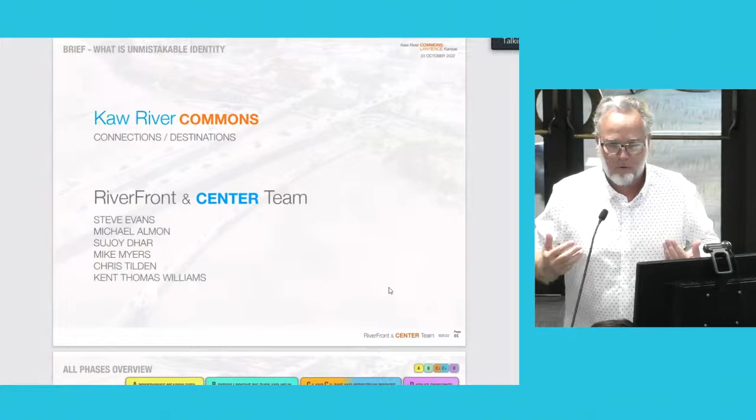In the context we're talking about here, unmistakable identity, I think we're talking about aesthetics, education, context, transit connections, ecology, how humans interface with the things that we create. We've become a society that creates amazing things, yet we've lost touch with how humans interact with these things. What is the narrative? What is the consensus that got us here? What was the initial intent aesthetically? That starts informing how unmistakable identity is unique to us here and the narratives that are important to us.

So I'm a part of the Riverfront and Center team. That's Steve Evans, also here. Michael Almon, Sujoy Dhar, Mike Myers, and Chris Tilden. And what's your name? Sorry. And I'm Kent Williams. Forgot to do that.

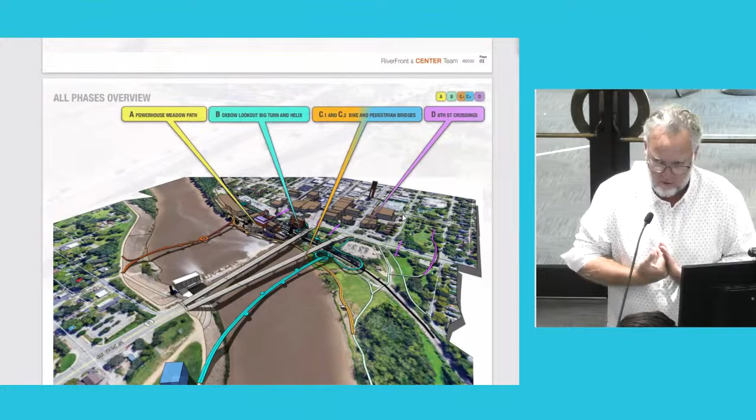I'm a Pinckney resident. I think most of you have seen this. I'll just quickly go over what we've been pulling together. This shows six phases in closing the loop from Santa Fe Station to Burcham Park, and then it also addresses conflicts that exist in this area for humans. It addresses the conflicts that the train tracks create, the conflicts of the twin bridges, and the wonderful barrier that is the river and getting across it.

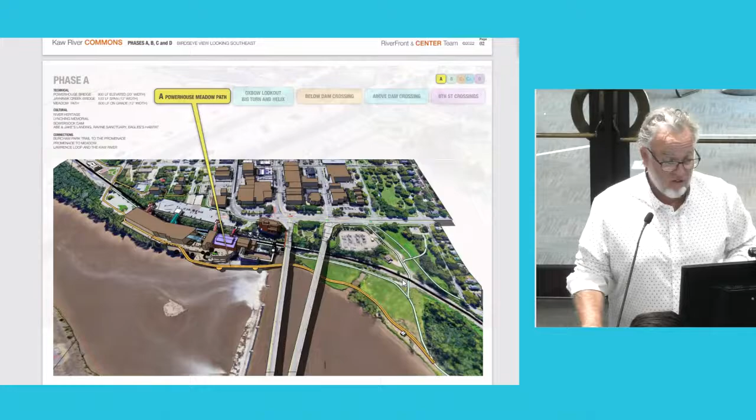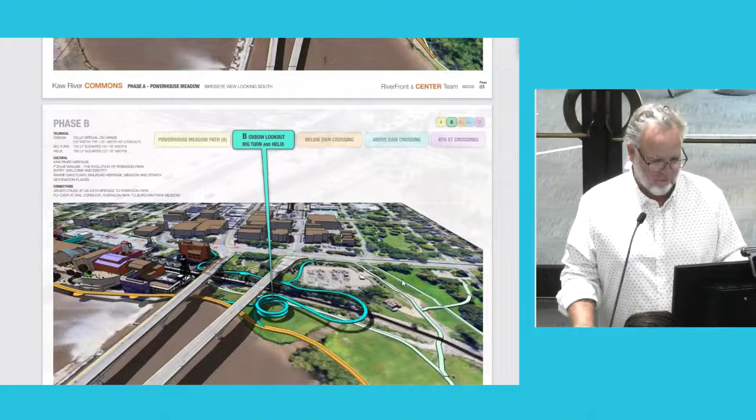So Riverfront and Center is the name of our team. One reason we created that is because however hard we focus on trying to come up with solutions to further connect the components of the loop adjacent to the river, we forget about the river because the way Lawrence has developed, it has disconnected the asset that is downtown from the river. This is something we've grown accustomed to, and I dare say almost accepted as normal. It's not normal. We need access to the river. Thanks to Friends of the Kaw, 20 years ago there wasn't public access. Now we have 20 points of access. It takes that sort of dedication to reconnect our communities to what is our greatest asset, which is this river.

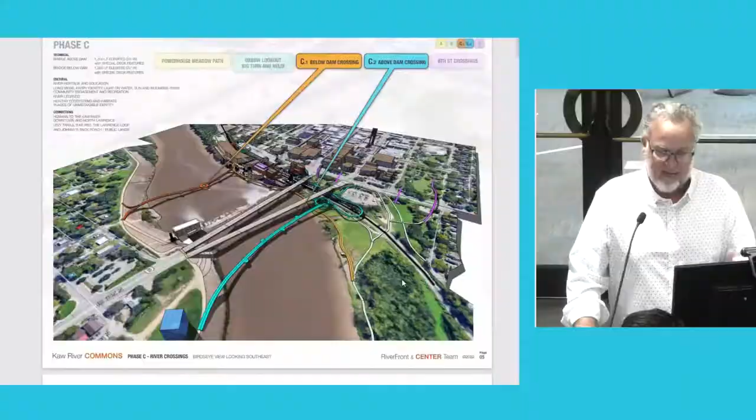Some examples of unmistakable identity.

So I was going to give him six minutes, if that's okay. It sounds like Steve is going to cede his three minutes to him, so it's unusual, but sorry.

Okay, so I'm just going to conclude quickly here with some examples of relevant projects that I think created their own version of this unmistakable identity. This is Austin, Texas, a pedestrian bridge and park space floating over the river. Greenville, South Carolina, another infrastructure project adjacent to a thriving downtown, but there was a disconnect between this fantastic park space where multiple creeks come together. Now it's been reinvigorated with this piece of infrastructure.

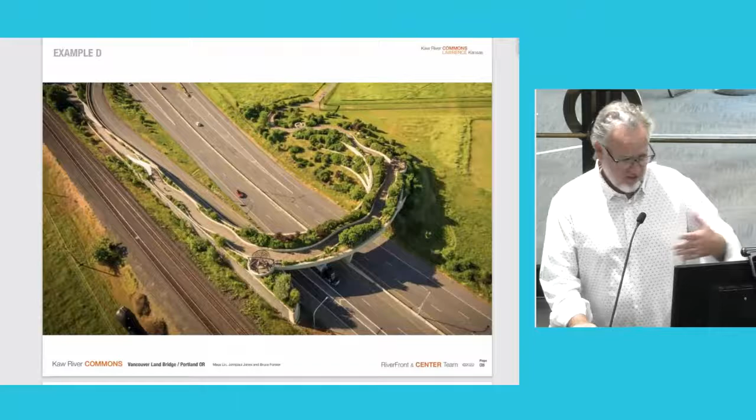This body of water here to screen left is the Columbia River. This is a project where infrastructure has a very specific aesthetic intention. Another example of a project in a riverfront here in Wichita - the Blackbear Bosin sculpture, which was previously very inaccessible, now has two twin bridges and seven fire pots. This has become a gathering place simply by adding fire and accessibility to the river's confluence.

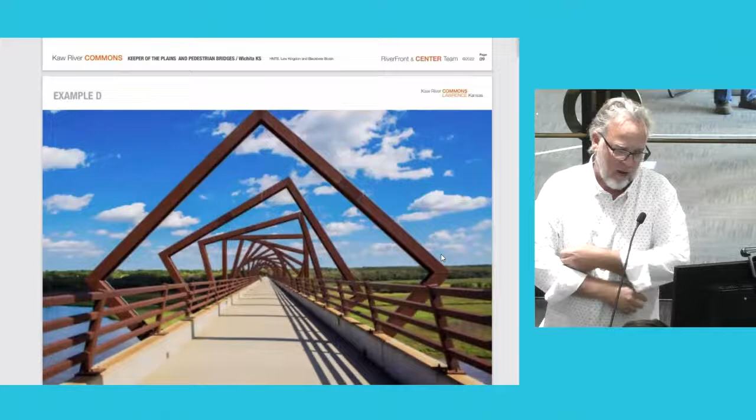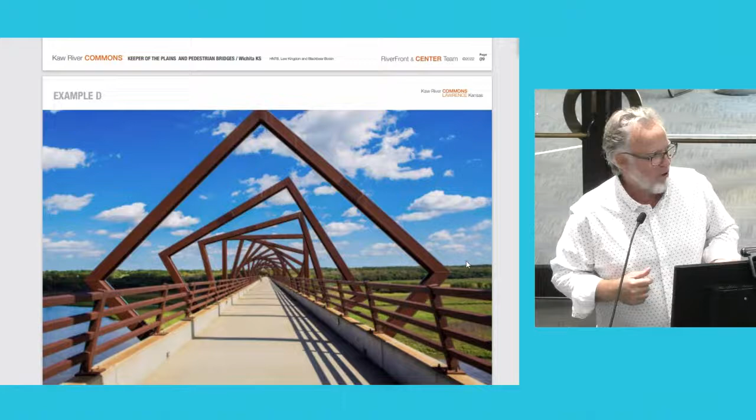And then finally, a great example of a repurposed project over the Des Moines River in Iowa, the High Trestle project, where artists infused periodic sculptures. Thank you for mentioning that earlier as an opportunity in our city to further what's already happening. This is just a delightful example of iconic identity and infrastructure.

So thank you all for doing what you're doing. It's a really great time for this conversation to be happening. We hope to support it. We hope city staff has the resources they need to continue doing what they do and expand that so that we can grow this opportunity to really tell the story of unmistakable identity that's specific to who we are at this point in time, aware of our challenging and beautiful history. Anything else, Steve? Nope.

Thanks a lot, Kent. Well, that brings us to about 6 o'clock, so that was pretty well timed. Thank you, everybody. Can I add just a little thing to this?

You're good. I was hoping to see the example of Kansas City's aspirational plan to build something like this that also includes restaurant space or dining space. I don't remember the name of it, but I remember a few years ago sharing it with Steve Evans, and it was just amazing. Like to think, oh, you could just hang out over the river and meet there after hours or whatever. And just, it felt like a place people would want to gather. And, you know, over a river is not a place you normally can gather. So it should be bigger than just a trail to me. It should be more than that. Like, can you put food carts out there at the very least?

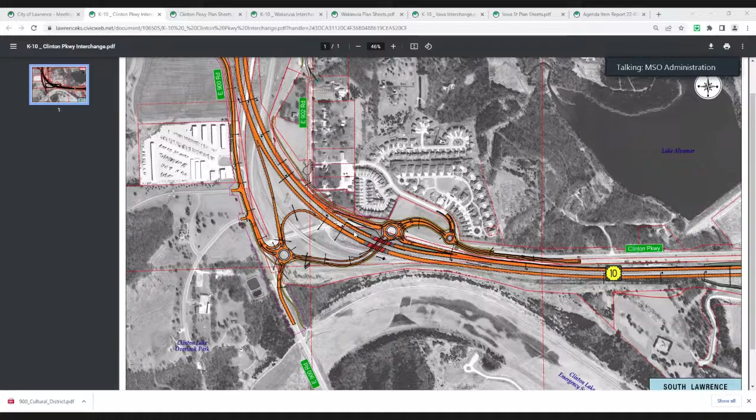So Clinton Parkway, we'll start with what the current proposed improvements are, and we'll hit Clinton Parkway, Wakarusa Interchange, and US 59 Iowa Street. You can see the aerial in the background with the existing improvements.

What's currently proposed is that we will have a shared use path on either side of Clinton Parkway tying into the existing paths. Those will continue through the replacement of the Lake Point Drive roundabout with Clinton Parkway. That's a very similarly sized roundabout as what's out there today, to give you some perspective.

The shared use paths continue on both sides of Clinton Parkway as you approach the westbound ramp roundabout terminal. The shared use path splits and goes north as a continuation of the Lawrence Loop as currently proposed. It also goes south to connect to the southern portion of the Lawrence Loop on the south side of Clinton Parkway, down to the spillway portion of the Lawrence Loop.

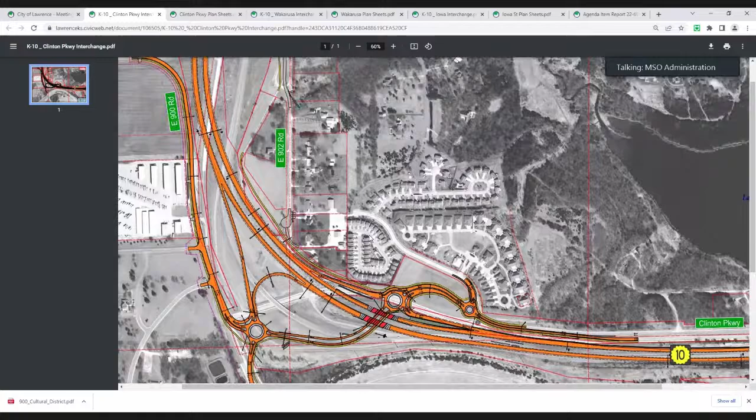Really zoom in on those roundabouts there, where they can differentiate yellow versus orange. So we added arrows—this is not proposed lane marking or anything like that. This is to help understand the movement of each lane and direction, how many lanes in each direction.

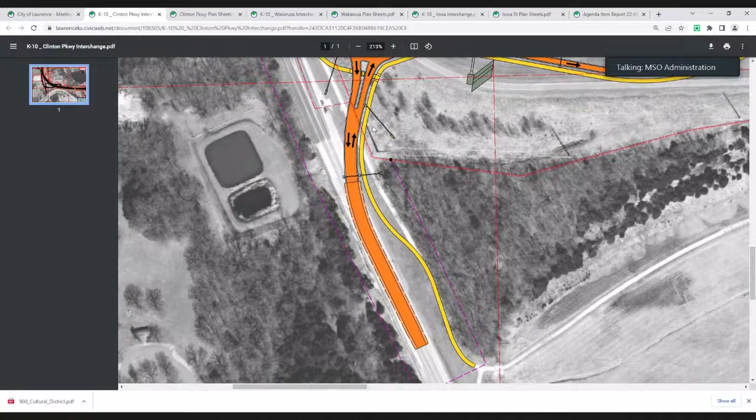The shared use path was kept on the south side of Clinton to avoid crossing the eastbound ramps, to try to minimize the amount of lanes being crossed. For the Lawrence Loop, there are some modifications that can be made to tie in a bit sooner. It's being picked up at the existing location, and this is a grade change, a profile change that is driving the profile of East 900 Road up to meet with the roundabout that connects to the eastbound ramps.

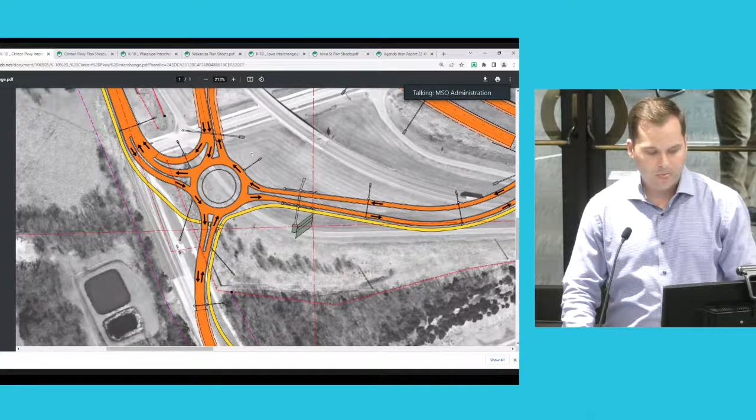Again, following along the south side of Clinton Parkway, one lane in each direction with a wide median. Currently proposed, the Lawrence Loop would go under K10, so no conflict with mainline traffic—it goes under those bridges.

And then it does cross the westbound K10 exit ramp, the lane that goes into the roundabout, and also the bypass lane that allows movement from the exit ramp to Clinton Parkway going east. Lawrence Loop is currently proposed to then cross Clinton Parkway, again crossing the bypass lane, the exiting Clinton Parkway eastbound lane, the entering Clinton Parkway westbound lane, and then the bypass lane to get onto the westbound entrance ramp. This continues west and then north, connecting up at East 902 Road.

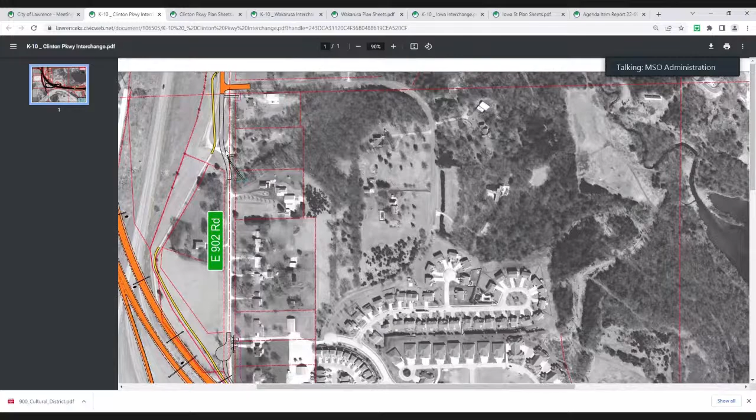There is some cleanup going on at East 902 Road, where there are a couple crossings today, and we're minimizing that, crossing just at the northern end.

A couple other points that have been previously discussed or asked about at various public encounters: the bypass lanes are proposed to be in use. One of the main reasons for the westbound exit bypass lane is to help alleviate queuing back onto the freeway, to allow eastbound movements to not get blocked by those Clinton through movements.

As the Clinton through movement comes eastbound, there is predicted to not be enough gaps to allow for movement of those entering the roundabout from the westbound exit ramp, which would cause a queuing back up without the bypass lane. Similar situation going eastbound on Clinton to the entrance ramp—the close spacing of the two roundabouts, and the bypass lanes, allows for the appropriate operational benefits to be realized at the Lake Point roundabout while not having queuing back up between the two roundabouts.

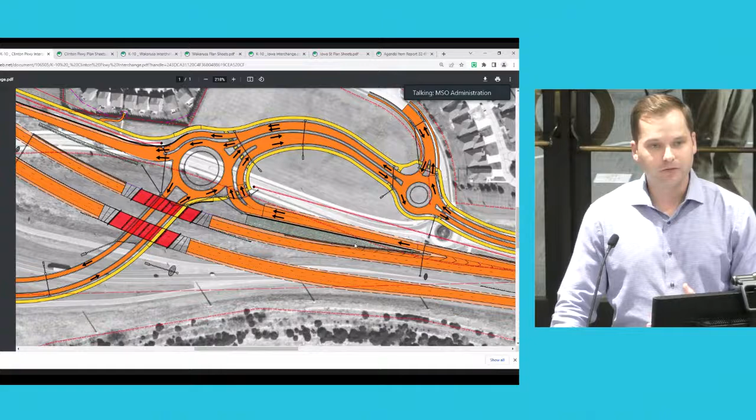Given the conflict of movements, we often look at what the queuing looks like in the peak hour or at different times of day to accommodate all vehicles safely on the ramp and through the roundabout. Without the bypass lane, because of this heavy movement of folks coming from Clinton to go west, the eastbound bypass lane allows people to get into that lane early to go east, reducing the queue on the ramp and avoiding backup near the freeway lanes. Does that help? A little bit.

I think I understand the purpose of the design. What I'm not sure I understand is whether it's 2,000 vehicles a day or 20,000 vehicles a day. I'm particularly interested in understanding how many vehicles are going to cross where people would ride a bike or walk across, where there are several crossings.

That's a good question. I don't know the number of vehicles a day off the top of my head, but I can get that information to you. It is also a very high peak movement - a lot of hours throughout the day won't see the volume of traffic you see during peak hours. I can get you information on how many vehicles are crossing that path per day at all legs of the roundabout.

Would there be any controls on that, like rapid rectangular flashing beacons or anything else to help people get across? Yes, currently proposed there are RRFBs, rapid rectangular flashing beacons, at each crossing for the shared use path, both at this roundabout, at Lake Point Drive, and at the roundabout to the west. That helps mitigate and notify drivers of cyclists or pedestrians who'd like to cross, giving the yield to drivers for those folks to cross the road.

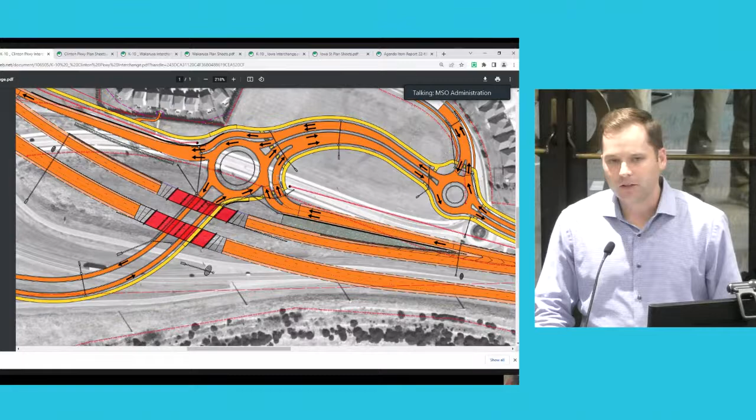Sure. Part of the effort with the bypass lanes is also to avoid multi-lane roundabouts, where you have two lanes circulating, which are known for significantly reducing the safety of pedestrians crossing, or slower moving folks going through the roundabout and conflicting with people trying to exit. So that's part of the purpose here, to avoid a multi-lane roundabout. You could argue that we are introducing aspects of a multi-lane roundabout with the bypass lanes, and that's a balance of trying to accommodate traffic and the volume of traffic that is expected in 2045. That's not something that is going to be here right when the interchange is open and construction is completed.

But it's a balance of trying to accommodate the vehicles and reduce the amount of conflict points with pedestrians and bicyclists. There are merging points here that are in excess of what you would have with just a single lane roundabout without a bypass lane. That's plain and simple, but it is a balance of trying to accommodate the operational needs of the roundabout. Okay, and those would be low severity? I mean, not with pedestrians. Right, with vehicles merging, it's a side swipe or coming together in the same direction.

Yeah, and you're right, Jordan, it does add conflict when we merge the bypass with somebody coming from the inside lane that eventually needs a one-lane on-ramp. Chris was saying, essentially it's a different crash type, it's less severe. You don't have rear-ending vehicles, but you have more side swipe crashes, which are typically less severe.

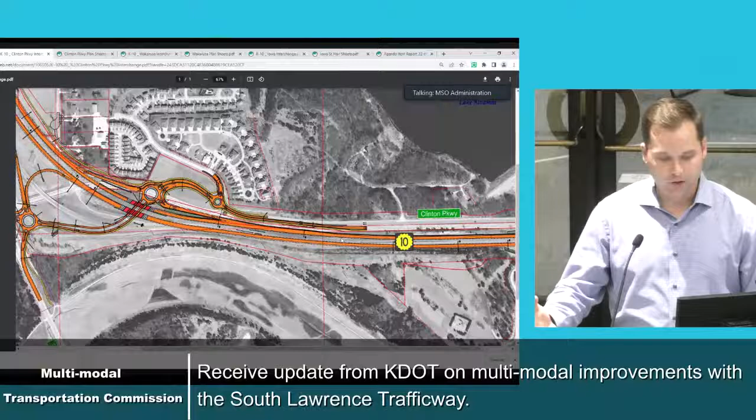As traffic along the network grows and the freeway is utilized more often, Clinton Parkway is set to experience growth in traffic volumes, which is what the city is planning for in terms of why it's a 4-lane facility. But you can also tell the predicted traffic volumes given the two lanes in each direction on Clinton Parkway. US 59 is a completely different situation in terms of what's expected for traffic volume growth there compared to Clinton Parkway.

Okay, so knowing the various pieces of information I'm gathering here, it seems like having the, geez, what are they called—bypass lanes, I keep wanting to call them slip lanes—it seems with the bypass lanes that we're sacrificing some potential low-level issues, but it could still happen, both with vehicles and with people on foot and on bike.

It's also pretty much doubling, or I'd say in that case, if you were to go from above the large roundabout to south, you're crossing six lanes of traffic. So that's triple what you'd have to do if there weren't bypass lanes.

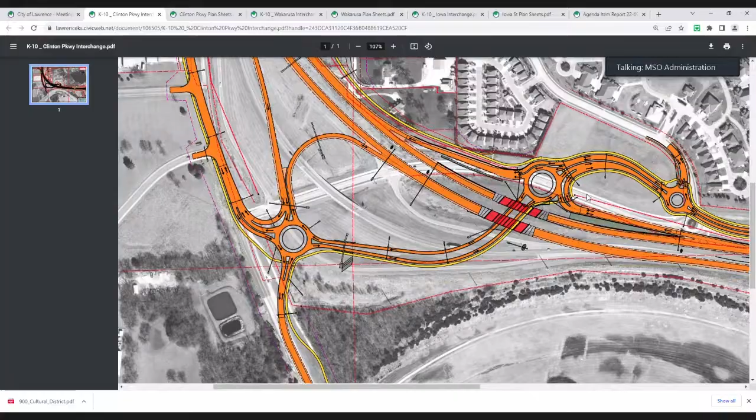And then there's the issue on the other side of the highway where there's a whole bunch of extra bypass lanes as well. So I'm coming at this from a more holistic angle, which is that every additional lane mile or lane 100 foot is additional asphalt we have to pay for, additional grading that has to happen, additional stormwater that has to be planned for, and concrete you have to upkeep in 10 to 20 years. I don't know whose maintenance budget it comes out of, but it seems like if we can trim stuff, given that in Lawrence there's always a need for more infrastructure funding for maintenance, it seems like if we can trim things we don't need for another 25 years, that might be good, especially if there's a safety benefit for all users.

On top of that, it seems these would be relatively easy to add in later. If you already have the right-of-way, this is all city, county, or state-owned land. For example, the rightmost bypass lane coming from westbound on SLT, taking that first exit, that really tight hairpin one, is directly within the right-of-way. That seems like it'd be a fairly easy add-on later if needed.

So it almost seems to me, from one engineer to another, that often on the treatment plant projects I work on, you know that in 25 years you're probably going to have a huge load of additional contaminants coming in, but it may not be there at first. So you want to be able to scale up over time to match the demand you're getting. So if there's any way to cut things down to match the present need, and scale up later, I feel like that might save on CapEx and OpEx here, and on safety. So just putting that out there.

This is something we've done in the past on other projects, where you build what's needed not necessarily right at the time of opening, but for some agreed upon interim year where you feel comfortable with the growth understanding that you have, what you have today, and what eventually will be needed. You can add on those things later.

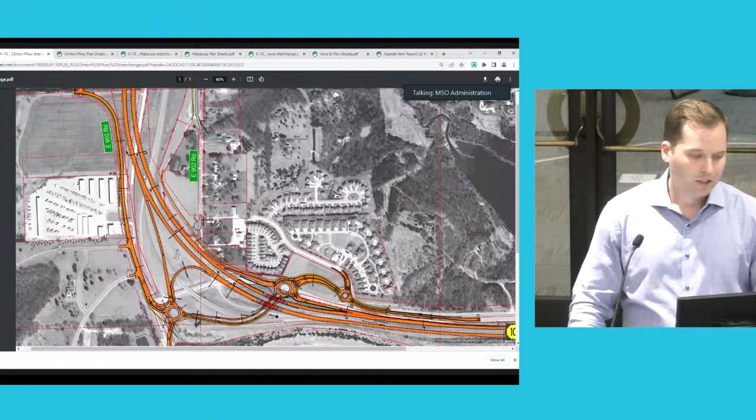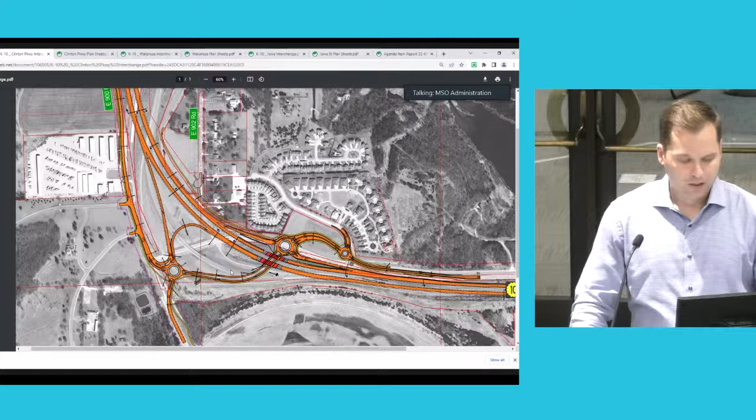We have considered, and actually Dave and his team haven't seen this yet, something we've been talking with KDOT about — instead of taking the Lawrence Loop south along Clinton, keeping it on the west side of the interchange up 900 Road, crossing at some point and using this area to gain elevation or go under K10 at some crossing angle, then utilizing the open area after the relocation of K10 to land on the other side and reconnect to the shared use path at East 902 Road.

That's very preliminary, nothing that's been discussed with the city, just something we were brainstorming in terms of how we could provide a grade-separated crossing to help increase safety. You would still probably provide all the crossing points being proposed here, but for through traffic on the Lawrence Loop coming around the spillway and continuing north, that would be an option. Of course, that comes with additional costs and maintenance that would have to be balanced against.

Because I see people who are cycling across the dam and such, those are more experienced cyclists who could maybe navigate something like this. But in terms of the continuation of the loop, that's where I'd really like to see something simple and grade separated to make sure it's safe for all users. I think otherwise it's going to stop people from continuing on, and they'll just go one way or the other, but not go through that.

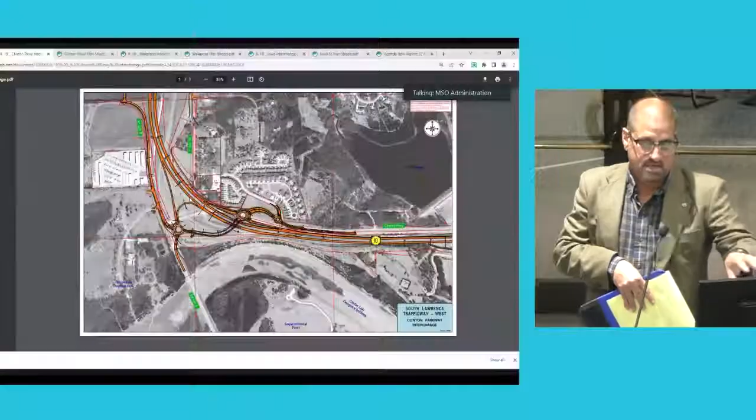I think philosophically we told the city no on grade separated crossings, like the one we're going to talk about a little later. But we are working with Matt Messina's group—Matt Messina is with KDOT, a new division, multimodal, lots of initials. We've reached out to him to see, depending on the annual funds they get which is specific to bike-ped and multimodal, other items as well, if that could help out on things like this instead of project dollars. It's still state or federal dollars, but a different pot, and in government that's a big thing. So I think we'll continue to work with the city on the potential for this grade separated crossing, probably a box like a 12 span by 10 high at this location. We're working with Matthew, and I don't want to overpromise, but that's another potential project that would be nice to get incorporated into the SLT, depending on how we can fund it.

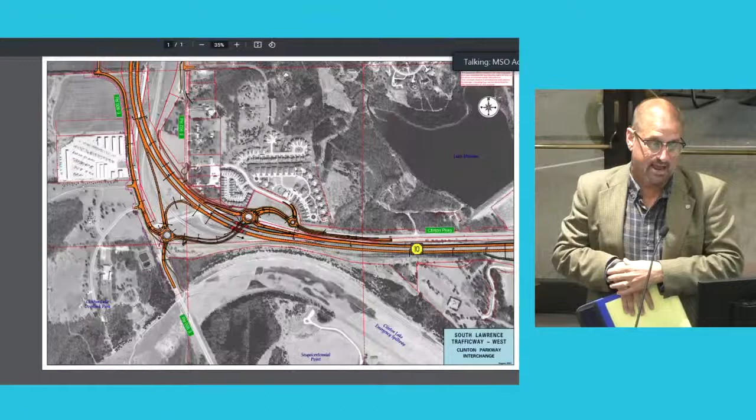Sounds good, sounds like things are happening. I'll be curious to see where that progresses, but glad to hear there is potential movement on that.

Cool. Is everyone good with Clinton Parkway? I had a couple more.

Sure, so this is a little bit outside of our purview, I know, but just out of curiosity, what's the deal with landscaping in huge void spaces? Why is it always mowed? Why can't you just let it grow like they do in New Jersey or Maryland or Pennsylvania?

So we are working with Dave and his team and others with Parks and Rec on working through a conceptual landscaping plan for each arterial impacted by the SLT, including Clinton Parkway, Wakarusa, and Iowa and US 59.

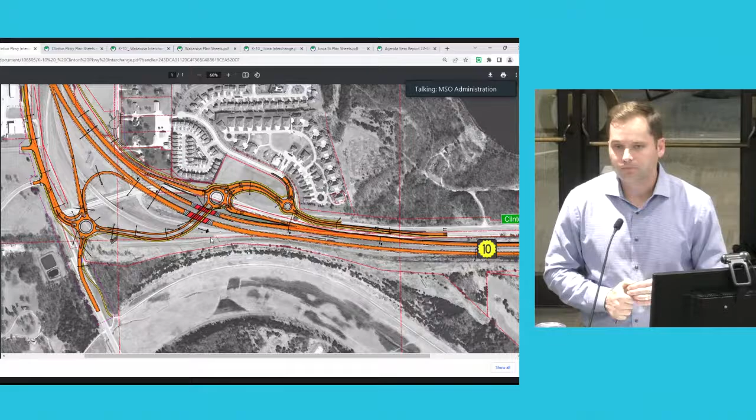We're not quite to a point yet that that's been defined and what's moving forward. So there's still opportunities for input there, but it's so noted in what you're talking about. It's something we're working through with city staff, trying to understand their preferences and understanding costs associated with those additional improvements and how that works with coordination with KDOT on KDOT's right of way.

I do know that up near the shoulder and the roadway, they mow. And then there's places like deep in an interchange where you've got a deep pocket, a ditch down 15, 20 feet, that they let grow. They mow it once a year though, which doesn't allow trees to grow. They may not want trees to grow, but I think they're on board with that. I do know they mow a lot of K10 once a year, but that's typically well away from the road.

Okay, well, good to hear that might be changing at some stage. Okay, let's see what else I had. North of 1415 Road - you briefly touched on this one.

On the far upper left side here, far northwest, you've got that road that follows the kind of dead end to the trailer lot. Currently, that just ends and becomes like a dirt road into some farm fields. It looks like here it's actually becoming its own thing. Where does the north end of that eventually hit? So you're talking about right here?

Yeah, so that East 900 road is planned minor arterial. The growth plan in the future is that would continue on to the west. But going north is East 875 road, and that would connect 900 all the way up to 1500 road, Bob Billings. That's the west side of Bob Billings.

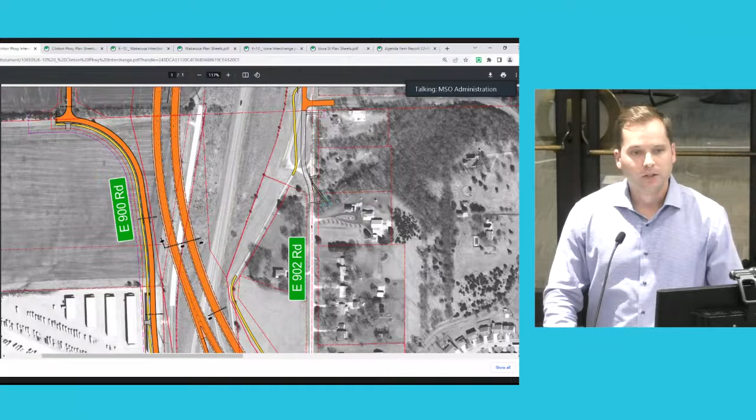Yes. So is it going to connect to anything or not really? No, this will connect from East 900 road. I should have brought a plot of this as well, but this will connect from East 900 road to North 1500 road. This is in the project mostly because of a maintenance of traffic route during construction. On the west side, as you all know, there's not a lot of local infrastructure to get people to where they need to go. So when KDOT is working through and constructing the new SLT, this will serve as a temporary route for folks to get to the park.

Okay, from the north and south. Okay, that makes sense. I just wasn't sure, because it's off the screen. And it will be a collector.

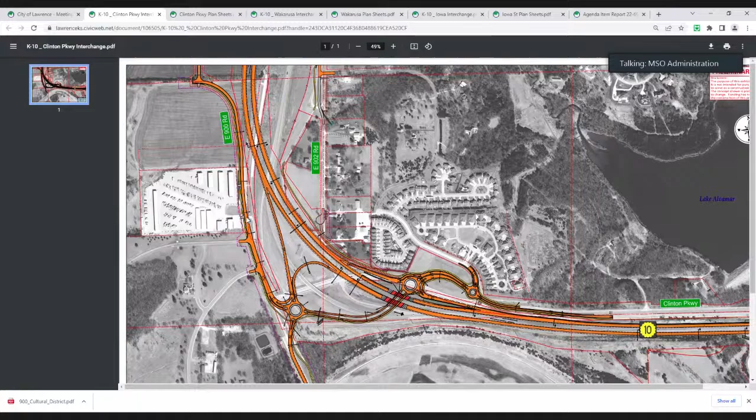Yeah, East 900 Road that you can see on the screen, that's part of the local participation of the cost share - upgrading that to put curb and gutters, and we had the shared use path on there originally. KDOT was building it as a maintenance of traffic road. So just to get that in place for future developments can be important, because like Jordan said, that's kind of the extension of Clinton Parkway north and then to the west. It kind of turns to the west in our transportation plan.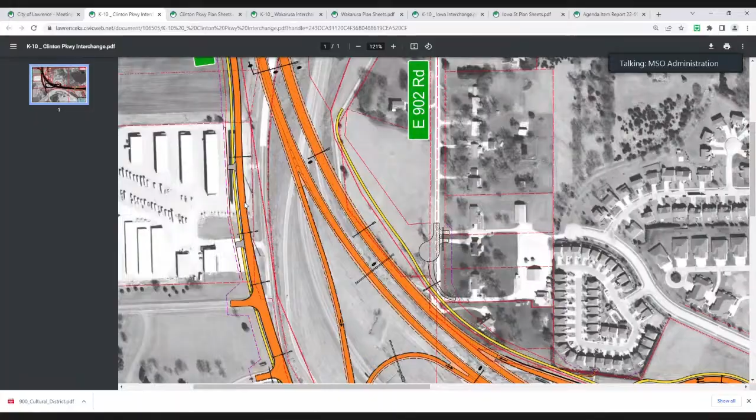And I think there actually is an area planned in development for this area, right? Is that where the new tenants to homeowners block is going to be? Up on the west side of the Bob Billings interchange? I want to say it's around there. There's an area on the southeast of K10 and Bob Billings.

Oh, it's southeast, okay. But there's also an area plan that Planning and Development's undertaking - the west of K10 area plan that goes as far south as this interchange, but then goes north up to 6th Street. And so that's currently being updated. Okay, thanks for the clarification.

Okay, and the final thing was the rationale for wide medians in the part that crosses the valley of the highway. Seems like everything else is relatively close together. Is there a need to have it so wide?

Right here? Yeah, so one of the main reasons it's wide right here is because of the clear zone of the piers, so we're avoiding vertical barriers of sorts by having the wider median. The other thing, because this is a single lane, if you have an abandoned car stuck in that lane, you need an ability to pass them. So on the inside are actually lay down curbs that are easily mountable to bypass a potential stalled vehicle in that single lane.

So is it like a landscape median almost? Is there kind of little curb bump-ups and then you could drive in it, or? So we are talking through some options of just having grass there, or there could be some paver area for landscaping purposes. It wouldn't be to sustain traffic or anything like that, but the city is proposing that as it avoids debris getting onto the road.

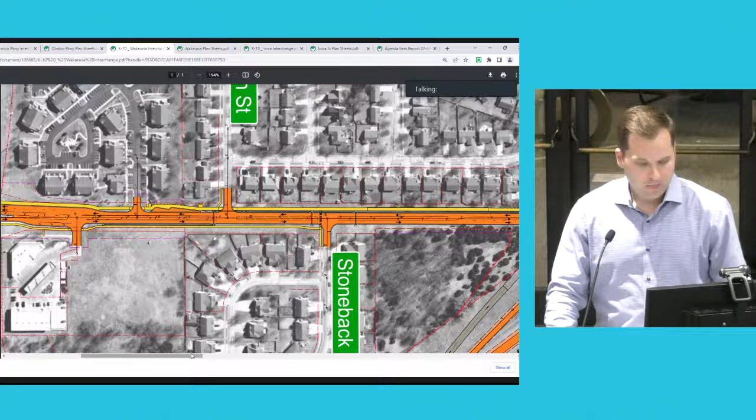Continuing south, the shared use path continues on the east side. It comes to a decision point where you can split and go further east down to 27th Street. 27th Street continues on to the east. It also comes on the north side of 27th Street, meeting up with the extension of the Wakarusa eastern shared use path at the intersection of Wakarusa Drive and 27th Street, which is now a through street.

I'll talk about in a minute how this all interacts with K10. But that crossing point is at a signalized intersection at Wakarusa and 27th Street. The shared use path continues along the north side of 27th Street and connects into the trails on the west side. It continues on the west side of Wakarusa down to a potential future southern entrance to the park, which we're coordinating on with the city and Parks and Rec.

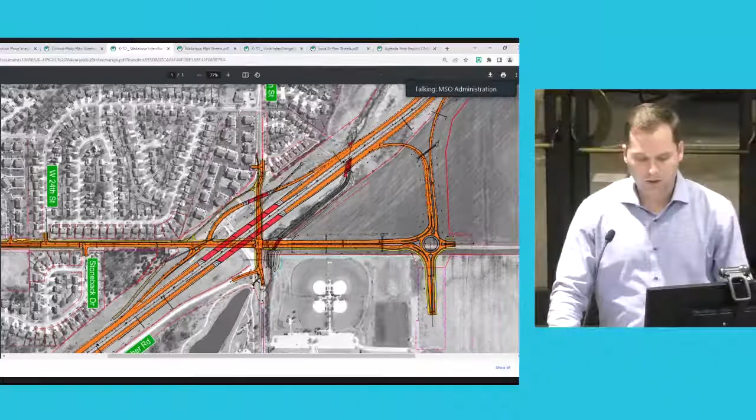We are constructing this piece, and as an aside, as we stage construction through here, there actually will be a connection made to the park to alleviate and provide access throughout construction on the south side. There is a stub out for a potential expansion of Wakarusa down to the south in the future, and that shared use path would continue as a separate path, or it's also been contemplated to merge with the lanes and go on street. But that's outside the purview of this project.

So for K10, the good news is that all the shared use paths are under K10. K10 is over Wakarusa and over 27th Street, so there is no at-grade crossing with K10 anywhere in this configuration. That's the crucial difference from what's out there today.

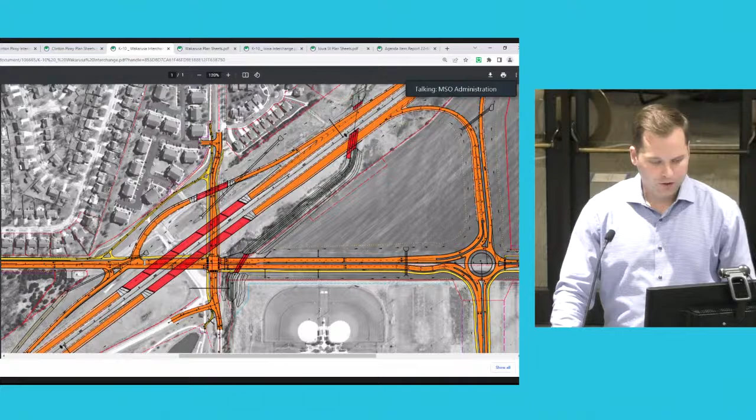So these two longer bridges are K10 westbound and K10 eastbound. Because of the through nature of 27th Street and how the configuration works today with the intersection of the ramps on the north side, there is a third bridge, different from perhaps what you've seen in the past, where the westbound K10 exit goes over 27th Street into a signalized intersection with Wakarusa. So that is a crossing point of the shared use path, at a signal, and the other crossing point is a signalized intersection as well. We're working again with the city on what's happening in this area—it's a bit of a unique circumstance with the bridges over and this open area between a ramp and two city streets.

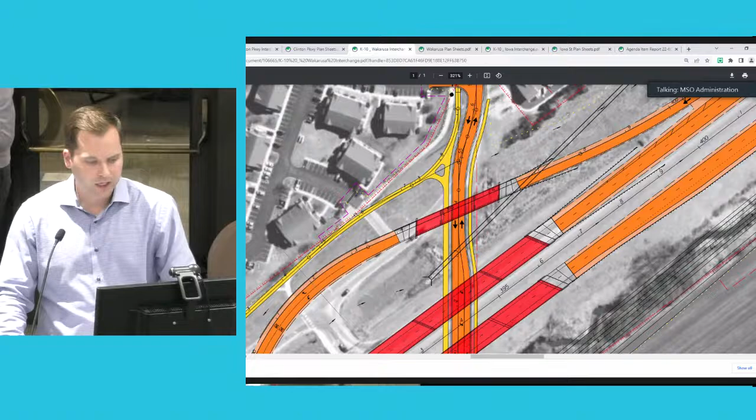So this is a sidewalk on the south side of 27th Street, shared use path on the north side. You have the opportunity to go over to Wakarusa, to go north up to Clinton, or you can continue to the west and cross Wakarusa into the park. But all of this is under the ramp bridge, under the mainline bridges. Are there any questions on this proposed improvement?

I had a question that's going to sound like a broken record, but the bypass lanes on the southern roundabout, I see that there's a bypass lane going southbound to take a right into an open field, so you said there was going to be some kind of road connection that's not shown here, is that right?

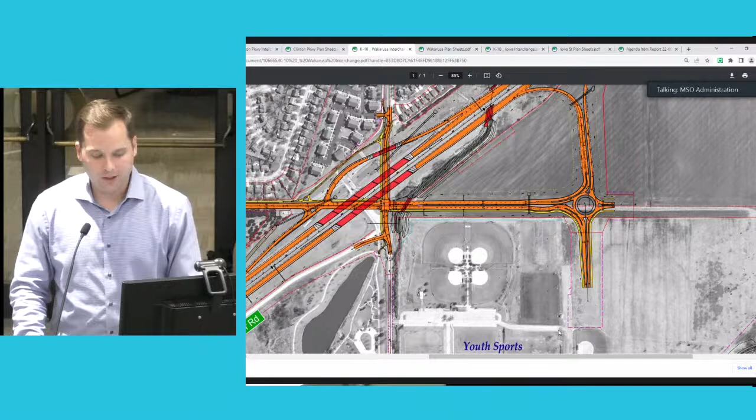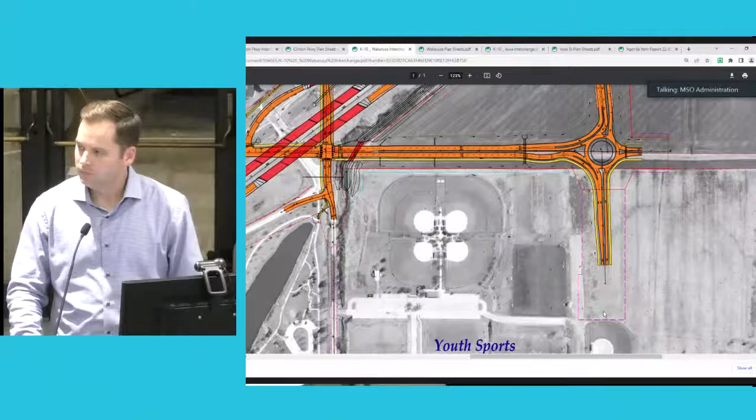You're talking about the one on the right side going south, right? Correct. Yeah. So yeah. Is that what you're asking? The one on the west side going? Oh, into the entrance park. To the park. Yeah. Yeah. That will be tied in with this project. So it's not completely shown on there. And I think if you zoomed in on it a little, there's a road there a little further to the north, but we had to slide it a little further to the south because of the turf project there. Okay. So it needs to be tweaked a little, but it will tie into the park, in the parking lot.

So is this another case where concerns over traffic volumes in the future led to putting in a bypass lane now? Because it looks like if things were to queue on that particular turn, they would just be on a surface road. It's not even on the highway, right? Good observation. This is not an operational use of a bypass lane.

So this was something that originally it was a single lane that was into the roundabout and out of the roundabout. So you're saying it's not operational? I'm not sure I'm following. Does that mean that nobody's going to use it? Or what does that mean?

People will still use it to get to the park. I think the main concern was on events that this would be a free flow movement into the park. But it's not a normal operational need for that bypass lane.

Okay. The one on the other side is, this one in particular with the loop ramp. This one is a back of queue sight distance concern where allowing folks to continue to go north, you can alleviate that back of queue, providing enough anticipation and decision distance to see the back of queue and make an appropriate response. Right. Yeah, so I don't really have a problem with that one.

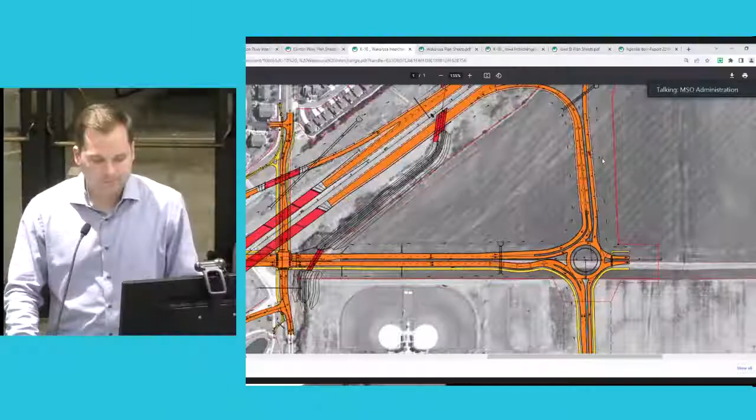It's a pretty long merge time and a split time, so it seems like there's not really a lot of additional conflicts there, but it does seem like the one going into the youth sports complex. In terms of backups and high volumes, a lot of that is going to happen right after the roundabout where people are going to try to find a parking space and be backing out. So if there's going to be backups, they're going to happen through the bypass lane anyway, probably, if everybody's using that entrance. So I don't know. I'm sure it's not a huge savings, but it seems like that could probably be trimmed, you know? It's a couple 100 feet of road that will get used maybe once every couple months. I don't know. Just throwing it out there.

On the plus side, at least there aren't any crossings, but if that Wakarusa Road does get built, you're probably going to want a crossing right there. So having 3 lanes instead of 2 is going to be just a little bit less convenient for cyclists using that road.

But otherwise, I really like the redesign. I think it's significantly more compact, and it's convoluted, but it makes sense. Like if you're driving and following the signs, it all makes sense. So yeah, definitely in favor still.

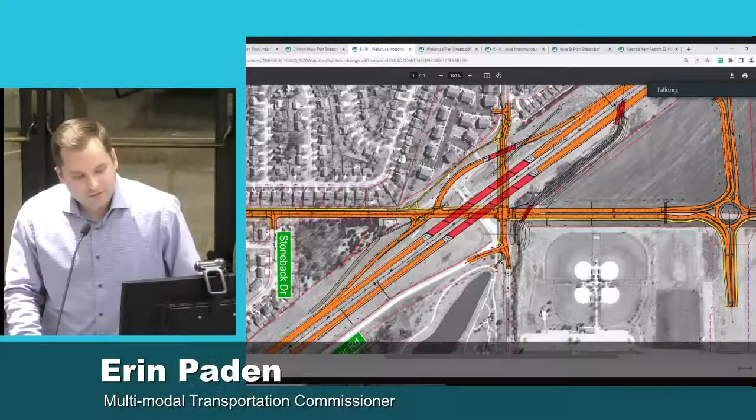All right, any other questions on Wakarusa? I have a question - it may seem not related to transportation, and it may not be. Can you tell me, along the Wakarusa there, what is happening? Are you talking about this thing right here? Yes. Okay, so that's what you're talking about. Yeah, good question.

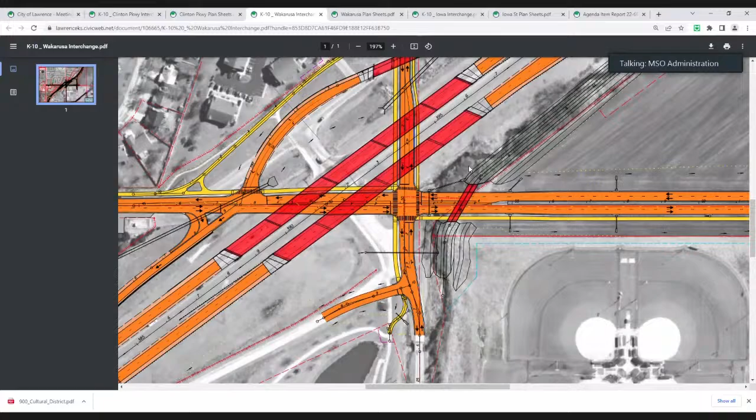It's not readily apparent - this is West Branch Yankee Tank Creek coming through here. Clinton Lake is over here off the screen, at the bottom. So there's a significant drainage component to what's happening with the SLT. Two main things: one, you can see on the bottom of the screen here, is called the diversion channel. Typically in a major rain event today, a lot of the area south of the SLT floods. In order for this interchange to work, that flooding needed to be resolved.

So a portion of that water is tying into the spillway and being diverted to the Wakarusa River. That's been a heavy effort we've been coordinating with the Corps of Engineers for the last 7-8 years, in terms of what those improvements look like.

Another important aspect of that solution is to regrade West Branch Yankee Tank Creek. So that's this grading through here - what we'd call benching grading. You basically have a channel and you're grading up, and depending on where you're at in the channel, you have different rock treatments to help armor the channel and avoid it weakening and washing away.

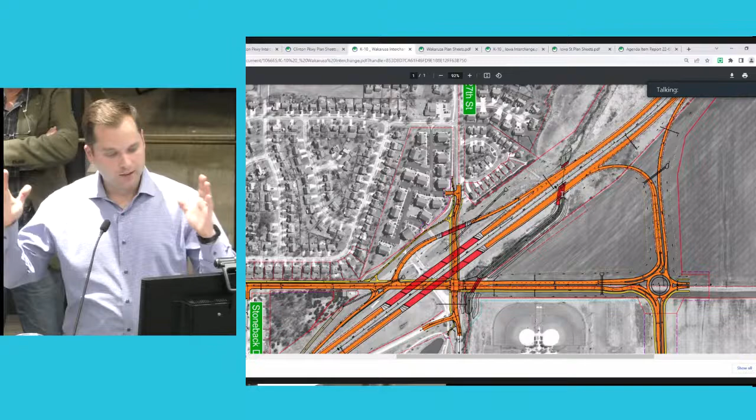So there's a crossing here of West Branch Yankee Tank Creek in Wakarusa - that's a reinforced box culvert. And then there's an existing crossing of West Branch Yankee Tank Creek with K10 that we're extending. This is actually a four cell opening today, so it has 4 openings that KDOT is reducing to a 3 cell opening to help with hydraulic design.

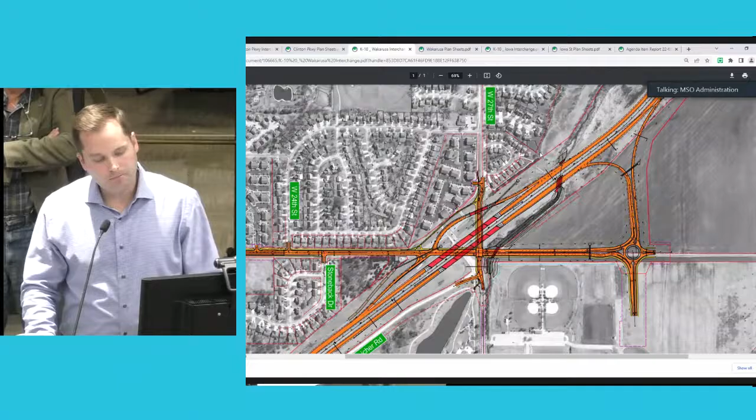Are you talking about the one under the main, under K10? Okay, yep, so it's 4 openings today and it's going to 3 openings, and that's for better hydrologic design, but also because of the diversion channel, some of that flow is being diverted elsewhere that's reaching there today.

So it looks like there's already a diversion channel topographically - are you just lining it with concrete as part of this project? I see it's outlined in purple dashed lines. Oh, that's a temporary construction easement - that's all Corps property, so that's not property that will be acquired. The Corps will continue to own that property, and then KDOT, the Corps, and the city will all come to agreements on how to maintain it.

So are there any improvements happening there then? Yes, that is not in existence today. Okay, yeah, it looks like there is a spillway of some sort. Correct, sort of graded like a grass lined ditch essentially. Do you need a lower Manning coefficient? Is that what's going on here? Sorry, I know this is way outside of purview. No, I just didn't realize that was even a part of the project.

So the spillway exists, and it will continue to exist - this is not diverting the spillway. This is tying in and carrying a certain amount of the flow directly to the Wakarusa River. Everything ultimately gets to the Wakarusa River today; it's just helping to capture that flow before it floods a number of the fields there, and helping to allow for an interchange to be constructed there where it currently floods.

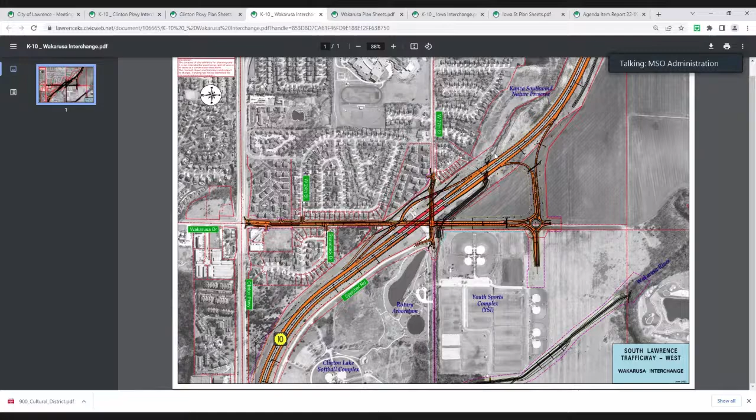I'm not an engineer, but since I've seen this in many places and I'm kind of a pie in the sky thinker, is there ever consideration, or would it even be possible to do like an underpass crossing there using those box culverts for bicyclists and pedestrians?

That would have to come with the understanding that water is sitting in that creek today. You could expand it at a different elevation to cross it, but in major rain events, those cells of the box are full and flowing with water.

Right, so go ahead. I come from this from a point of view - I lived in Boulder, Colorado. It's a base of 4 canyons, and box culverts are often used for bike and pedestrian underpasses. So you have a bike path, and then you have a lower one.

You could. You'd have to look at the flood elevations and make sure that there is an opportunity for that to stay dry, or a mechanism to close that path if it can't. Right, so like there, where sometimes they're not passable, but yeah.

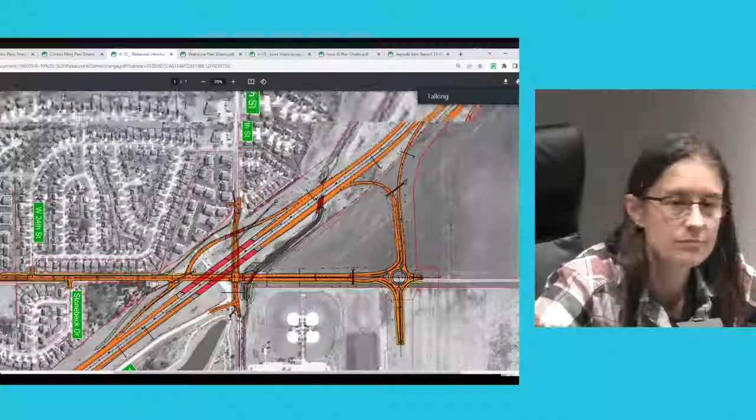A concern I have, and I'd like you to address, tell me if I'm just off on this, but Wakarusa is primarily 2 lanes of traffic both ways. And as I kind of look at the space that's south of Clinton Parkway, currently it's just 2 lanes, 1 in each direction, and it really gets backed up significantly.

And it looks like it's wider in this proposal, a little bit wider as it goes further south, and then it gets really wide, maybe even wider than Wakarusa is now. I'm just curious, how does the volume of traffic - is it not associated with how wide the road is? Are you expecting more people to be on it further south? I just imagine most people would be going closer to the city, so the volume would be higher between Clinton Parkway and the highway. So what am I missing here?

Most of the traffic - it's a great question. I'll come back and hit the first part of your question, because there's a lot of different parts to what you're talking about. Most of the traffic actually comes from elsewhere along the freeway, so that's why you see most of the lanes and capacity in between the 2 terminals.

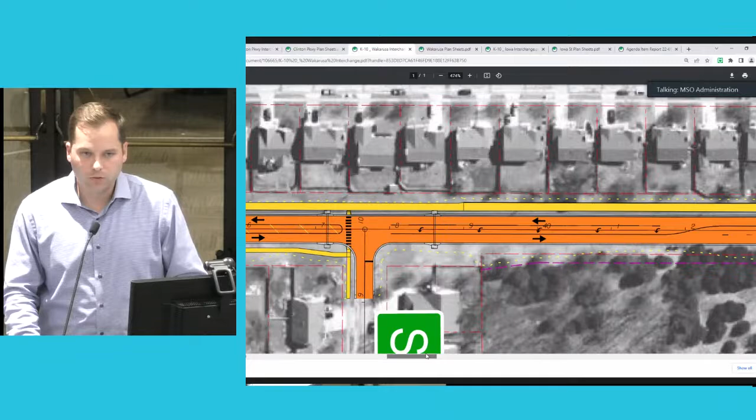As you go north, you're right, there are existing congestion issues today. This is widened from a single lane in each direction to 1 through lane in each direction with a shared turn lane. Depending on where you're at, it alleviates turning movements to get them out of the through lane, so through traffic can continue to flow while those turning, predominantly left turns, are in the shared turn lane. That's all the way up as you go here.

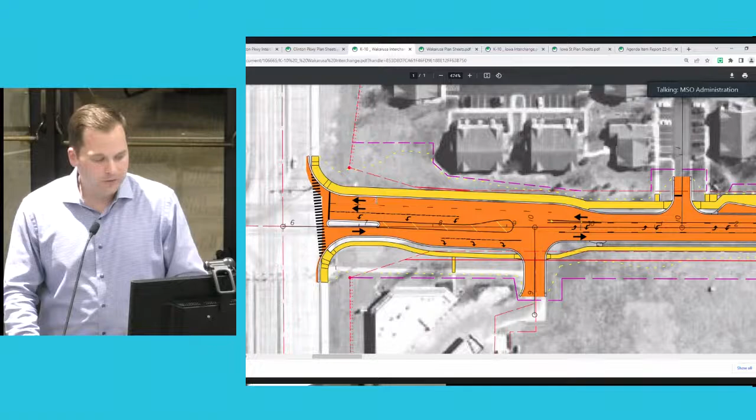As you approach the intersection with Clinton Parkway, another lane opens. This is something we're working with the city on, in the project to the north, on how this coordinates with the improvements going north. But right now, how this is contemplated, it actually opens up an additional through lane.

The main reason for this, and why it's not a right turn only lane, is for peak times you really need the 2 lanes that have the ability to go north to reduce your signal phasing, so that you can clear the queue and get them on the north side of the signal and reduce the time you have to show green for that particular movement, to help balance the signal phasings for the rest of the intersection.

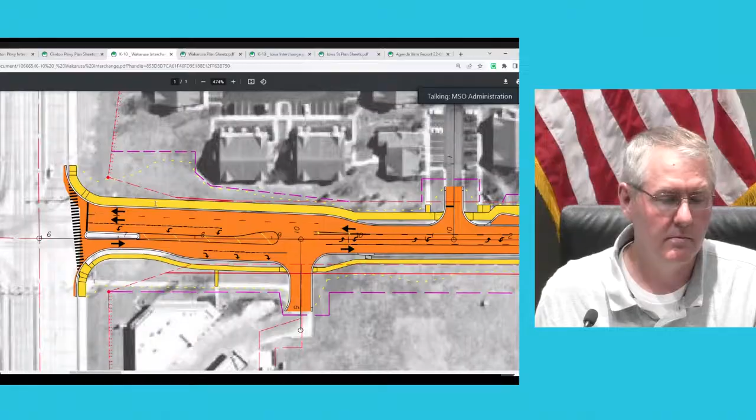A dedicated right turn lane would not do as much for you, because your queue for the through movement would continue to line up past the opening of the right turn lane. That's why right now it's shown as 2 lanes that can go through to the north, and there are 2 northbound through lanes as part of the other city project as it's currently proposed.

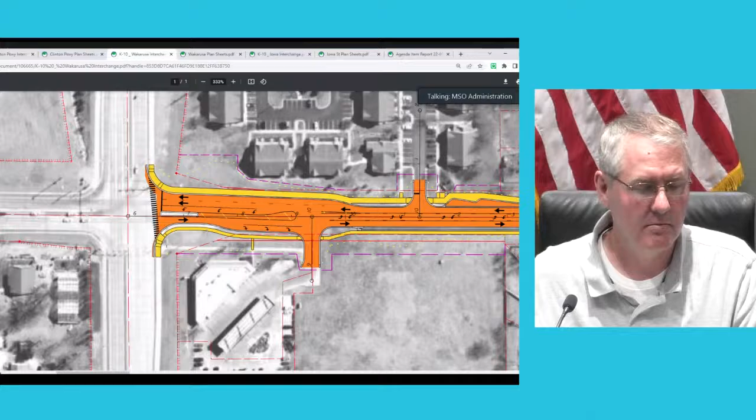That makes a lot of sense. Going south, is it still just the 1 lane? That's still just the 1 lane going south. We did introduce a right turn lane here after - kind of today, there's a lane that kind of merges in right south of the intersection.

So again, most of your traffic is being generated between the terminals, but as you approach the ramps, you start to see that second lane open up and add capacity throughout Wakarusa.

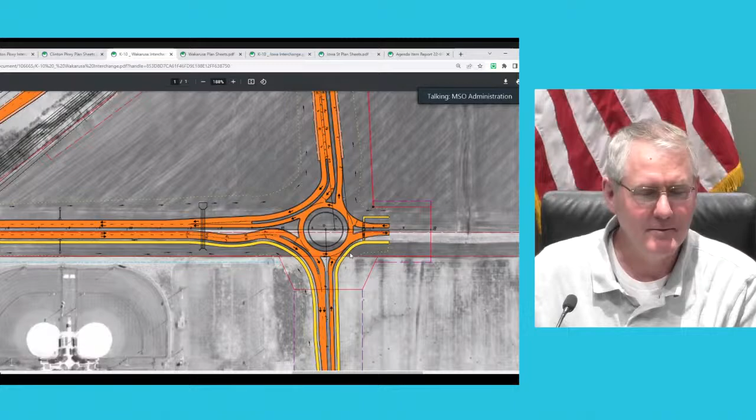I think this roundabout on the south side is concerning to me because I feel like we would imagine people going on the shared use path. They would be crossing this at some point if this road continues south. You've got a crossing and a sidewalk on the south end of the roundabout, but nothing on this extension that goes into the field on the east side. Feels like later we're going to have to build another crossing.

Yeah, that is something we have broached a little bit with the city and parks, and I think there's a conversation we need to continue to have. There's been talk about a mid-block crossing after you get west of the roundabout.

Do you have a crossing somewhere in here after the lane merges in, to reduce the number of lanes you're crossing? An important part of this design is it was kept on the west side away from the ramp lanes, reducing the number of crossing points you absolutely had to have. So that's something that needs to be coordinated on what sort of crossing this looks like in the future.

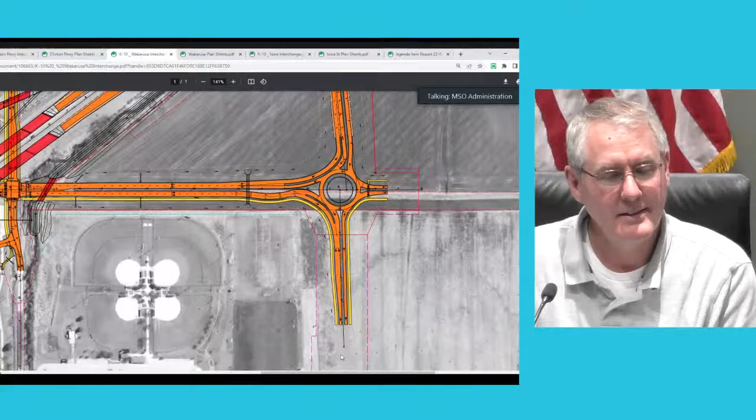I go back and forth on this, like should that crossing be further to the west? But at that point you have 2 lanes of traffic going west. When they cross where that little median is, it provides a little refuge, I guess, similar to what you're doing back at the previous intersection we talked about. So where's the best place for people to cross when there's only 1 lane of traffic they have to look at?

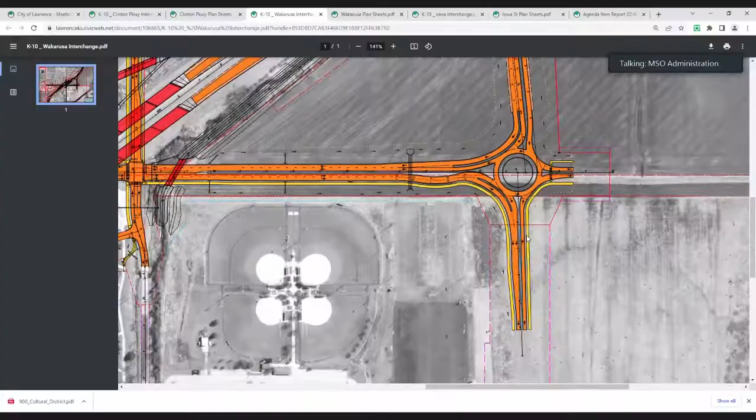Feels safer in my mind. You're absolutely correct that the fewer lanes you have to cross, the safer it is. Well, it could look like you're going to have to cross 3 lanes if you go closer to the roundabout, but at least you're crossing one at a time. Whereas if you're further away from the roundabout, now you've got 2 lanes of traffic, and who knows who's deciding to switch lanes in the middle of all that, or what car is blocking the other car from the other lane.

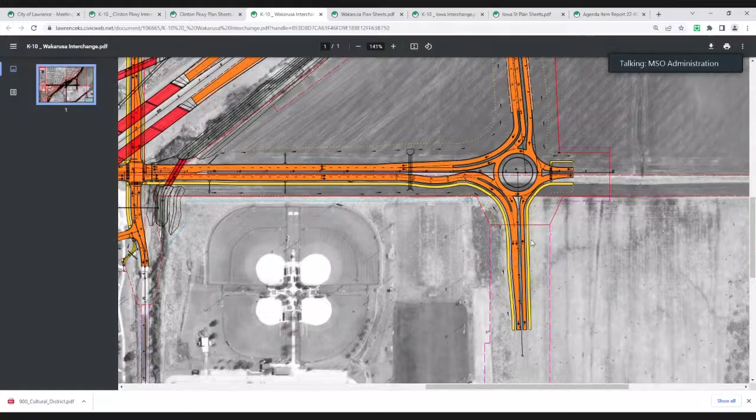So I guess a mid-block crossing would be good, but I also feel like that's harder for pedestrians maybe. It's also usually at a more unexpected location. People usually expect crossings at an intersection, whatever that intersection looks like. If the median was extended to keep cars from crossing over, then I suppose that's maybe the best of both worlds, I don't know. Or if we could eliminate the bypass lane, then you'd only have 2 lanes to cross. That would be maybe even better.

I'm not sure I understand the bypass lane there. I think I understand now a little better why there are so many lanes here, though, because it's the traffic coming off the highway adding into the overall volume.

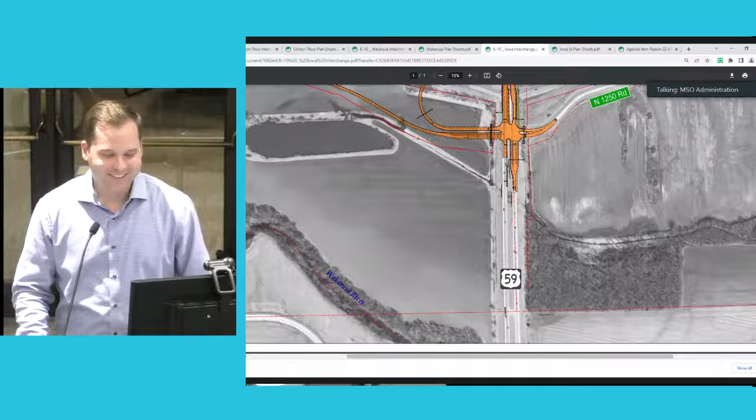All right, let's go on to US 59 Iowa Street interchange. Okay, I'm going to change perspective on you one more time. Back to normal, right? Or is it upside down? North is south, keep you guys guessing. Okay, so north is now up at the top of the screen. K10 is going across from left to right, and US 59 Iowa is, of course, going up and down on the screen.

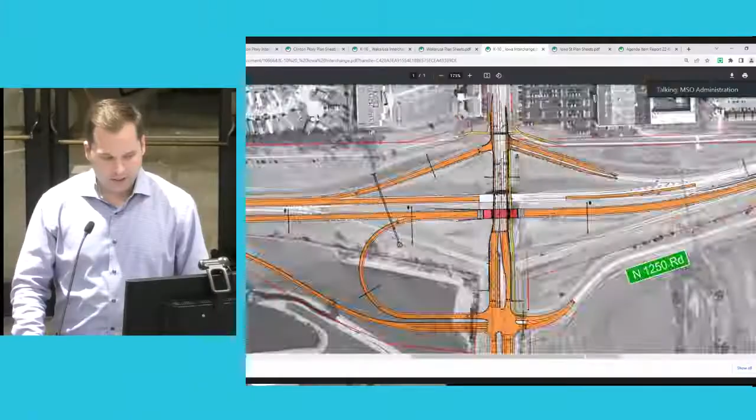So my first question here is, has anything changed since the last time we saw this about 12 months ago? Pretty much the same, just a couple minor changes. This up here hasn't really changed outside of some connections back to the existing, reestablishing connections that are out there today to the areas of development.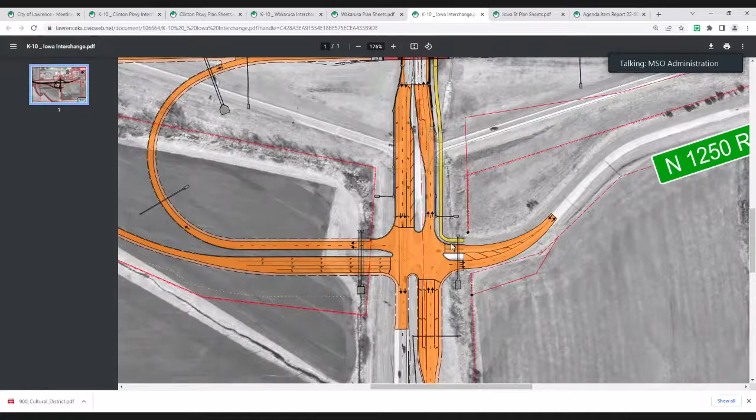And right now, I think previously we showed a crossing. There really isn't anything to cross to down here to the south, so right now it's just kind of a diversion into here. At least they're not crossing a street where they can't get back to where they need to be, especially for visually impaired folks or those with other disabilities.

Probably the biggest thing that's changed since you've last seen this graphic is focused on the north side of the westbound exit, westbound entrance ramp of K10 with US 59 Iowa Street. Chris Norton was alluding to it earlier, where there's discussions with others at KDOT and the city on whether there's an opportunity to share in the cost of upgrading this from an at-grade intersection crossing of the Lawrence Loop to a grade separated crossing.

We've been working on developing concepts. We had a few concepts that we focused in on. A couple options: one is a bridge over, and one is a tunnel under.

So the tunnel under is an 8-foot tunnel, not preferred. The preferred height is 10 feet for a pedestrian or bike tunnel. The reason for the 8-foot proposal is because of how flat it is out here today. It's very difficult to drain that tunnel as you go down, and the additional 2 feet to get to a 10-foot tunnel basically requires having a pump to pump the water out of the tunnel, given the elevations we're working with.

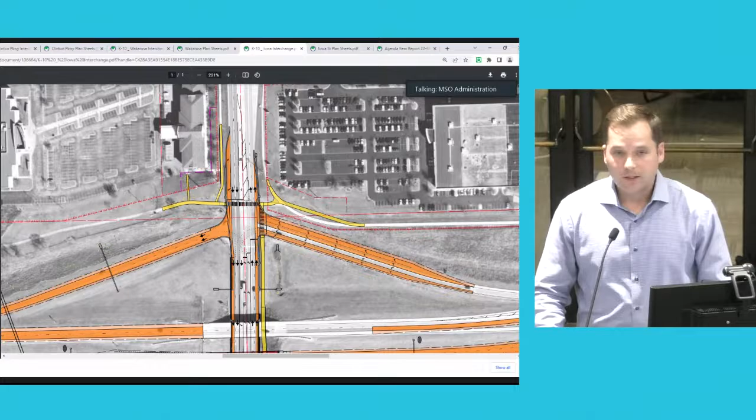Could you explain the rationale for the 10-foot standard tunnel? We are known for our basketball team, but they don't all walk down there—on a bike, people standing up on a bike or something like that, it poses a safety issue. 8 foot is acceptable, but the preferred in the AASHTO bike guidance is 10. Well, as long as we can get away with 8, it would be acceptable. I wouldn't have a problem with it given my height.

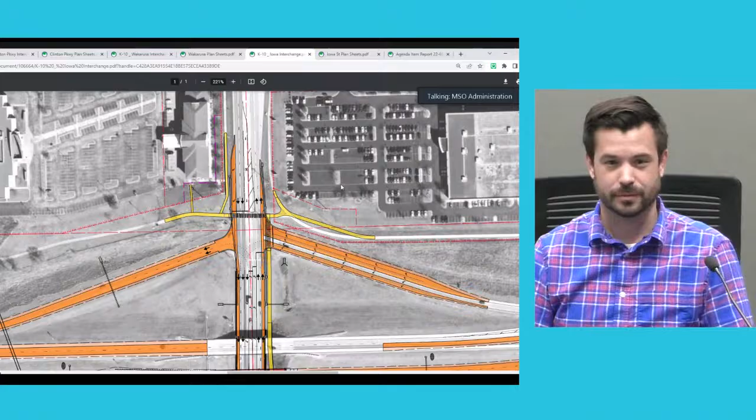So the last we heard on this crossing was that it had been brought up to KDOT and it was not originally accepted as a cost share project. So it sounds like those talks have been kind of evolving toward maybe—is that correct? Yeah, and Chris can elaborate on this. This is something with a different bureau, a different set of funds that we've been working to identify.

I would say it's not part of the local match of the city. So again, different pots of money mean different things to different people. It's important, I guess. We're working with the Division of Multimodal—it's a longer name than that—Matt Messina and Jenny Kramer, Matt being the division director. It was a good first talk. We'll see, and we're keeping the city engaged on that, and we'll see where it goes.

I'm kind of curious as to the rationale for why it was denied as a match project in the first place, since removing conflicts between multimodal pedestrians and bicyclists would actually be a good thing for users exiting and entering the highway, because you'd have less things to worry about safety-wise.

It was denied as what? It was initially denied as a match project, is what I understand. Oh, like a cost share? Yeah, like the Wakarusa extension or the Farmers Turnpike improvements. Yeah, I'm not sure, I wasn't involved in that. Okay, it sounds like it's moving forward in some way, perhaps, through that other division.

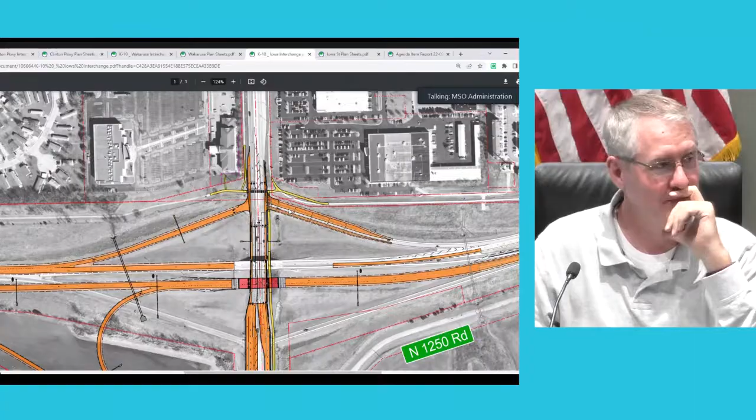Maybe this is just outside the scope, but it feels like having that thing just end right there is missing something obvious. I don't know if that's too far from the project or not in scope, but having that shared use path go along 1250 Road and then somehow cross over to connect to the Lawrence Loop seems like this might be a good time to try to add that in. I don't know if that's more David's area than KDOT's, but it just feels like an opportunity we should consider.

Yeah, I think in the long term, if that parcel develops in the future, 1250 Road would be relocated to the south. When there were some discussions about rezoning that years ago, a concept was shown to go through that property and not be along the ramp. So that would be something we'd hold for the future development, but definitely would want at that time to improve the road to city standards and make that connection.

Did you want to keep going? Nope, you're all done with this one.

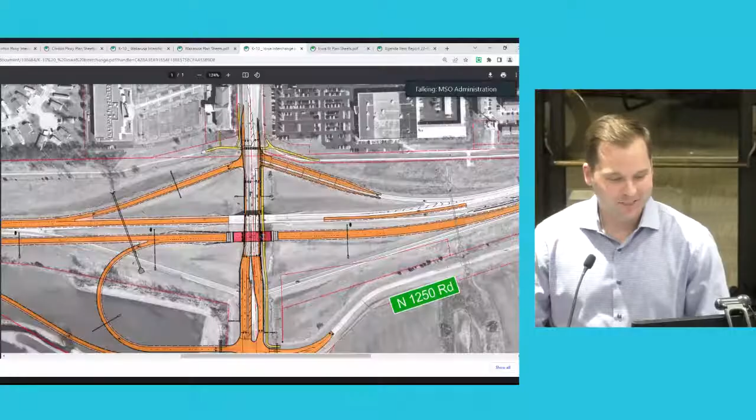I didn't really touch on it, but there's a shared use path on the east side of the road, a 10-foot shared use path with connections on the north side. Outside of a grade separated crossing, we've been working with the city on some other mitigation measures. This will be signalized, so you'll have a signal you can actuate.

Other discussion topics include one of the main conflict points that exist today: right turners who are stopped and yielding, then making that right turn and hitting pedestrians or bicyclists. One option is putting up signs that prohibit right turns on red. Another option discussed at a high level is a pedestrian-only phase, which has significant impacts on the operations of the intersection, but it's something that is an option.

Do you find that no right turn on red signs are largely effective? It is something that is regulatory, so you can monitor and regulate that, which is different than what's there today. It depends on the situation. They are highly effective if you actually can't see what traffic is coming towards you. So that's not the case here. The case here in utilizing no right turn on reds is to prohibit a conflict with pedestrians and bicyclists. So that's something that might need to be regulated for a few weeks in partnership with local law enforcement, but it could be effective if used appropriately.

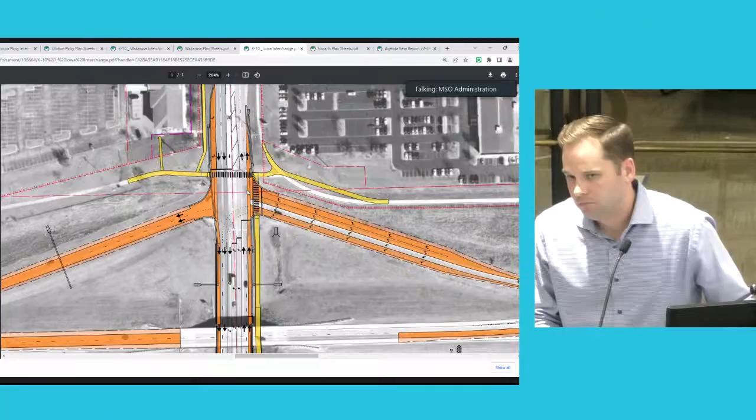My experience at that intersection is that's been the most dangerous part of it. You get the light and wait for the cars to stop, but you have traffic behind you and you can't really see, and the right turn on red is where you feel the most vulnerable in that case.

So the path on the east side, then crossing the exit ramp, that's proposed as at grade then? It is at grade as well, signal controlled. That crossing does not exist today. Right, yeah, it's a good addition.

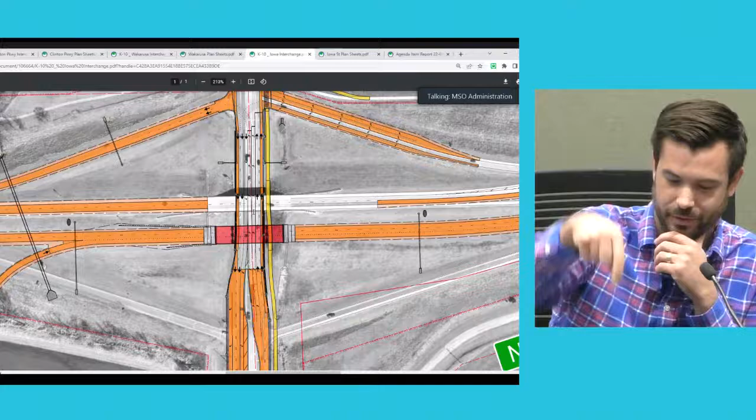I had another comment that could probably be filed under potentially misguided attempts at cost cutting. There are 2 left turn lanes extending north under the new overpass. They seem to be going for quite a long time, considering I can't imagine traffic coming from Ottawa is that heavy, or people turning around and getting back on the highway is heavy. I don't know who else will be using those left turn lanes other than folks coming from south of the county. And since there's only a single left turn lane going south in the opposite direction from the actual city, it seems kind of out of balance considering who's coming from where.

Good question. So there is a lot of traffic projected to grow, and one of the main movements utilized is the north to left — northbound US 59 turning left onto westbound K10. In the peak hour, you try to alleviate and allow for the through movements and provide enough storage length to accommodate the max 95th percentile queue. So of all the runs, you try to accommodate the 95th percentile queue, and that's the storage you provide. That queue falls right around here.

South of the bridge, because of that major movement, there might be a little bit of trimming you could do to eliminate the left turn lanes, but it is needed in the peak hour to allow for those left turners to queue up while still allowing the through movements to also queue up at the signal. But it's a balance of those signal timings, determining what green phase each leg of the intersection gets to clear the queues.

On the southbound side, the main difference is that this is going into a future development, not the ramps. That's a right turn. Right turns have greater capacity because you have the opportunity to turn right on a yield condition. There is an accommodation for a future left turn here if this area were to develop.

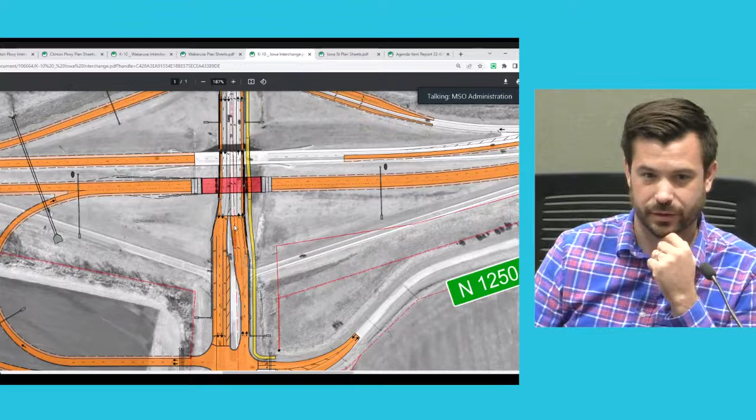Okay, so getting back to the ones going north, you were saying the 95th percentile queue goes all the way down there. Is that with the single turn lane, or with two does it actually go all the way down there? How is it currently? Are we even close to that, or is this like a 200% increase here?

So I think it's a single left turn today, and half the size.

I don't remember how far south it goes—the aerial in the background's not doing me any favors. But I think it's somewhere right around here, right at the bridge where it opens up and they switch. The left turn goes north, and to the south of the bridge, the left turn goes south.

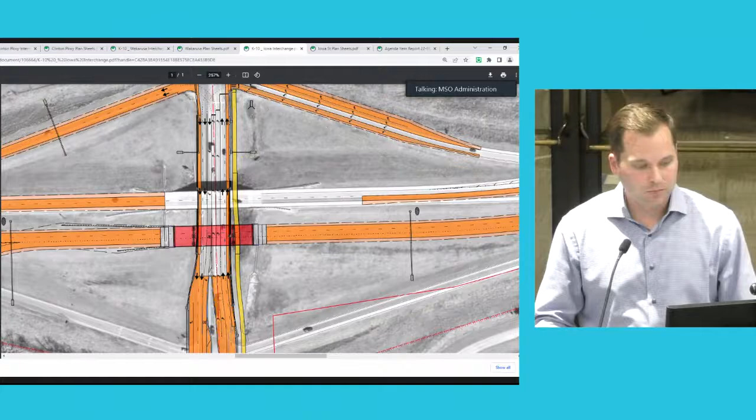So it is a major change from what's out there today. Again, US 59 is expected to see some significant growth in traffic coming out of the city, but also going into the city.

Just out of curiosity, where do you get your data from in terms of growth projections that would show so many new cars coming from south of the city? Is Ottawa expected to go through a boom period, or is this more of a Panasonic thing?

This is pre-Panasonic. The MPOs is where we get our growth models—metropolitan planning organizations in Douglas County. That's where we get our growth models and predicted growth rates from.

Interesting. I don't know if you're privy to this—I think we brought it up earlier—but the comprehensive plan for Lawrence out to 2040 shows this as a tier 3 growth area, so there really isn't supposed to be much of anything going on here for the next 20 or so years. So it sounds like it must come from... it's already pretty far south in the county, so I can't imagine what else would be growing down there.

I don't know, it just seems a little bit unusual that that's where the growth would be coming from, not the city itself. But what do I know?

All right, any other questions for this interchange? I would just like to go on the record as saying I highly support a grade separated intersection there. Just to make that clear—right here, that one, yeah, this one right here. Yeah, right.

Cool, if there's no other questions from up here, we can go to public comment for this last one. Everybody good? Okay, any public comment for the final interchange design?

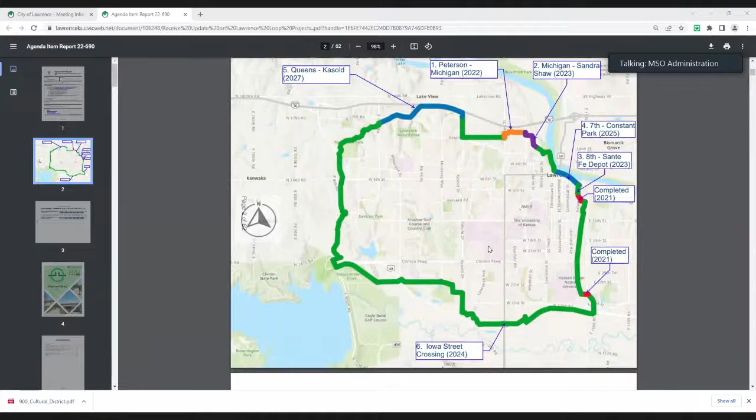Speaking to that capital improvement plan, I added up all the funds there, and we've got close to $10 million allocated for these Lawrence Loop projects, to describe the scope of the work we're doing. Jumping into the map, I'll go through these in numerical order and give you a quick update.

So number 1, our Peterson Park to Michigan segment. I don't know if you've been out there, but we're really close to opening that entire project up. We'll be working with Parks and Rec, who we spoke to earlier, on a ceremony to do a ribbon cutting to celebrate that project.

Then we moved to the Purple Project, Michigan to Sandra Shaw Park. We're getting really close to final plans, working on property acquisition for that project, slated for construction in 2023. That's what's in parentheses, the years when we anticipate construction happening.

Number 3, we jump one, and that's our 8th Street, Santa Fe Depot to 8th Street in 2023. They're behind the Quonset hut, making that short connection between existing segments there. We've got funding budgeted for construction next year for that project.

Number 4 is going to be our 7th, the Constant Park or Kaw River project, as kind of a collaboration with some community advocates that we spoke to earlier. Next steps on that are really some planning and preliminary design next year. Right now we're looking at potential construction in 2025, contingent upon finding some grant funding to go with that project, but the capital improvement plan does have the city's cost share budgeted in anticipation of that. So we're kind of set up to succeed in the event of that happening.

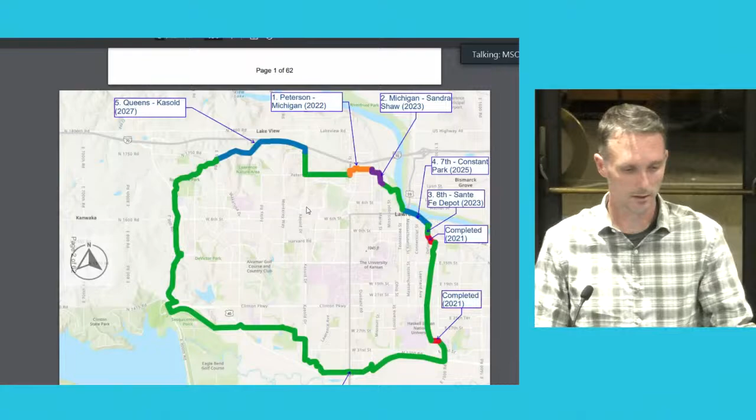Going across the map, number 5 is the Queens Road to Kasold there in blue. That's probably our farthest out segment, in 2027. We've got a lot of right-of-way probably to acquire there and some planning as well before we get to construction. It will probably be a partnership with KTA based on some of the alignment next to the turnpike as well.

And lastly, number 6, Iowa Street Crossing, 2024 anticipated. We stole a little bit of the thunder from that one with the discussion we just had. But as you can tell, we've met with KDOT Transportation Planning, Matt Messina and Jenny Kramer, who spoke to the commission within the last year and a half. We're working on a partnership for funding with a cost share for that project and tying it into the South Lawrence Trafficway highway expansion.

And I think that's really all I had prepared tonight. Other than that, I'm happy to take any questions the commission has on project updates.

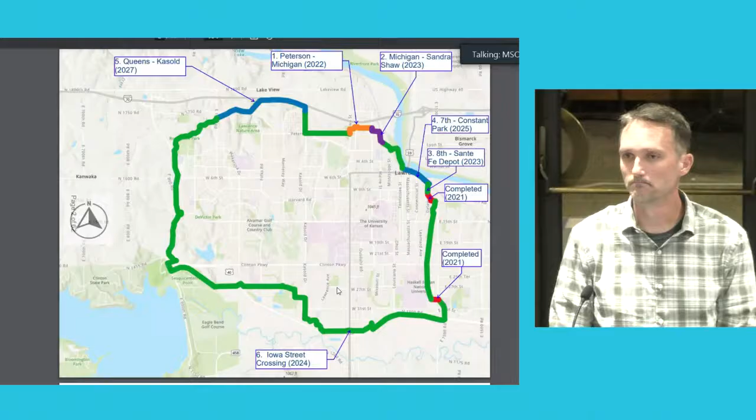Any questions from the commission? Just what time is the ribbon cutting scheduled for? What's the completion expected on that?

So we're expecting the project to be complete this month. It is October now, this month. Ribbon cutting is kind of in Parks and Rec's hands. Roger Steinbrock is going to take the lead on that from what I understand. They have a little more experience in that sort of thing than we do. Yeah, my question was really the completion of the project, and I kind of missed that when you said that, but yeah.

Great, that's really exciting. I'd just like to comment that as I go through these historical things that all happened right before I showed up in town, it looks like you had a lot of public outreach to decide what kind of path is the best, which route to take. Generally, it seems like the ones that people voted for are the ones that have happened, which is cool. It's not saying that nobody listens to citizens, but it's nice to show that this is exactly what you wanted, and this is what we built. Although I do notice that for the one going through downtown, a lot of people did vote for the one that goes through the building, which is a pretty wild path. But I think with the Riverfront and Center idea, something like that may eventually happen anyway.

Could you comment a little bit more on what the plan is for Riverfront and Center? I remember seeing in the CIP that there was an alternate bike path that was going to be from Santa Fe Station to Constant Park, but through downtown.